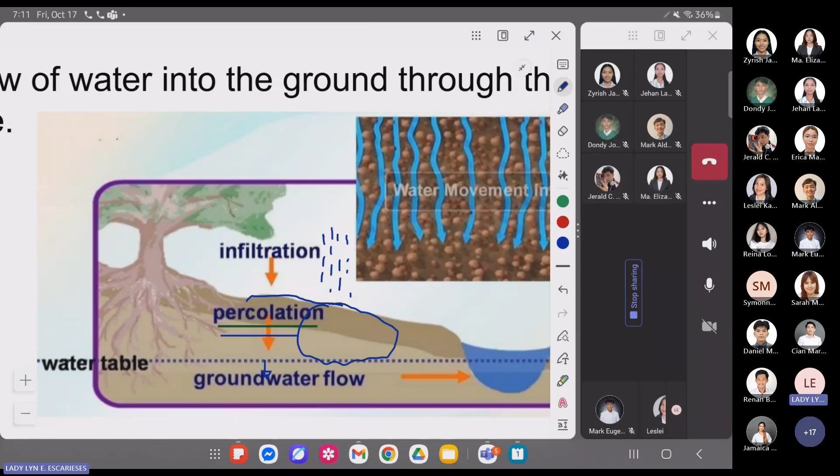So when we say infiltration, this is the flow of water into the ground through the earth's surface. When we say percolation, that is the flow going to the groundwater storage. So that is percolation.

So we calculate the infiltration rate and the cumulative infiltration. This is very important so we can know how much surface runoff there is in a watershed. The infiltration rate is the rate at which water enters the soil at the surface, while the cumulative infiltration is the accumulated depth of water.

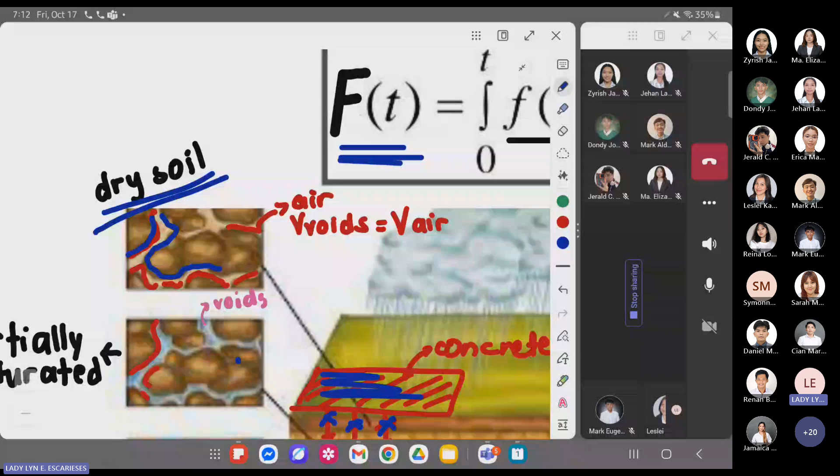As you can see in this figure, when soil is dry, the area of the void is equivalent to the volume of air. Or the volume of the voids is equivalent to the volume of the air, as shown in our figure. When it is partially saturated, some of the voids have water. Whereas when fully saturated, the volume of the void is equivalent to the volume of water.

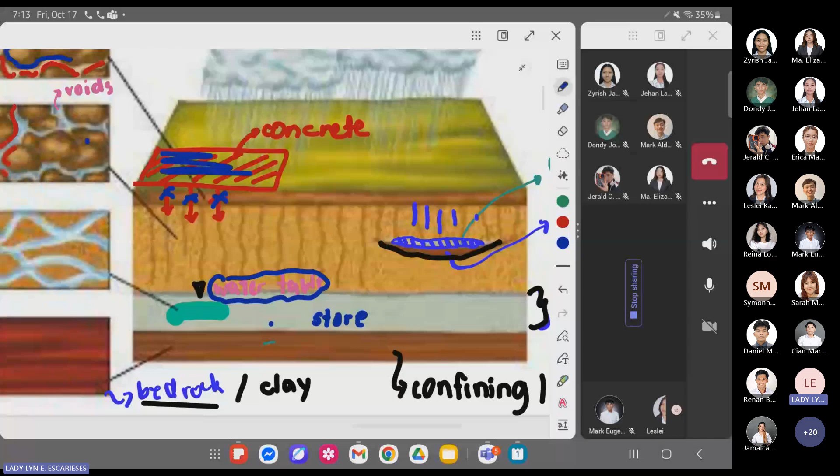But as you can see, this is higher than the water table. The water table we assume is constant, so that is the base flow. While at the aquiclude or aquitard, it's only a perched flow - meaning water only accumulates there when it rains heavily, or when water infiltrates at the location of the aquiclude and aquitard. Did you understand this?

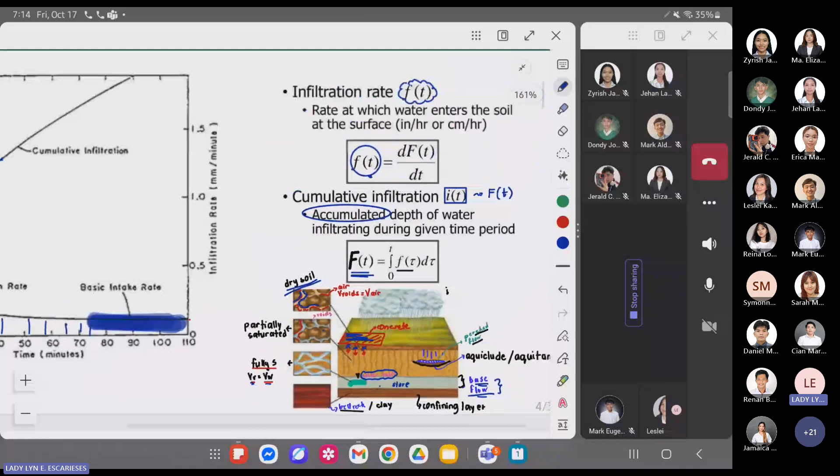Clear naman po. As you can see in our graph, the infiltration rate is inversely proportional to time. So as time goes on, the infiltration rate value decreases, because the soil is becoming fully saturated. When the soil is fully saturated, there's no more water that can infiltrate. Understood? So there's no more downward flow.

Okay, infiltration is downward flow. When fully saturated, the tendency of water is to flow laterally, though it still depends on gravity. And the cumulative infiltration, since it is the sum or accumulated depth of water, therefore increases as time increases. Is this clear?

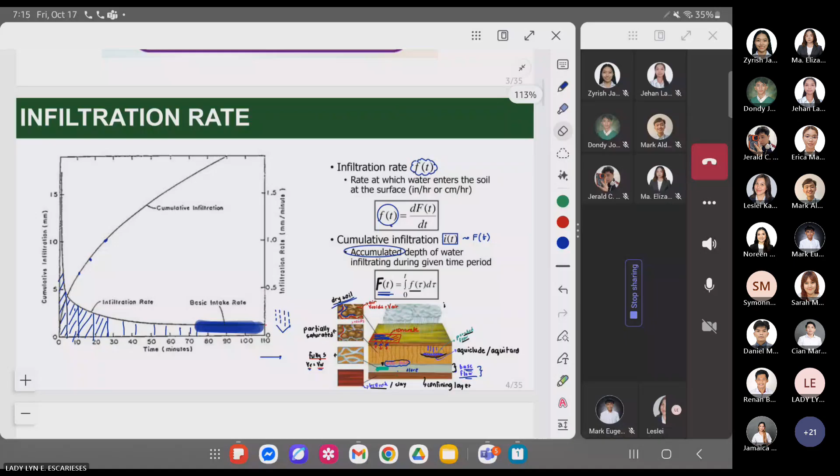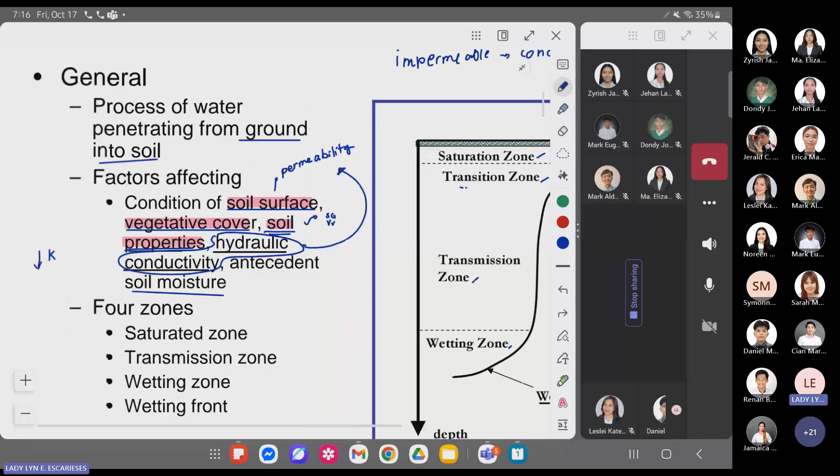So this is another visual representation of infiltration. As you can see, we have here the moisture content, which is theta, and this is what we call the wetting front. This wetting front is also a parameter we use to compute infiltration. There are 4 zones in the subsurface: the saturated zone, transition zone, transmission zone, and then the wetting zone and the wetting front.

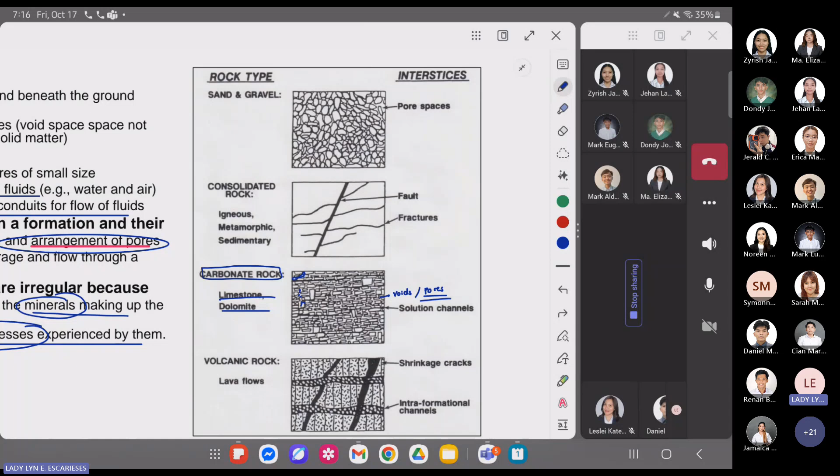As you can see, different types of rocks and soil have different voids or pores. These pore spaces or voids are where water can be stored or can flow. So this is the distribution of the subsurface water.

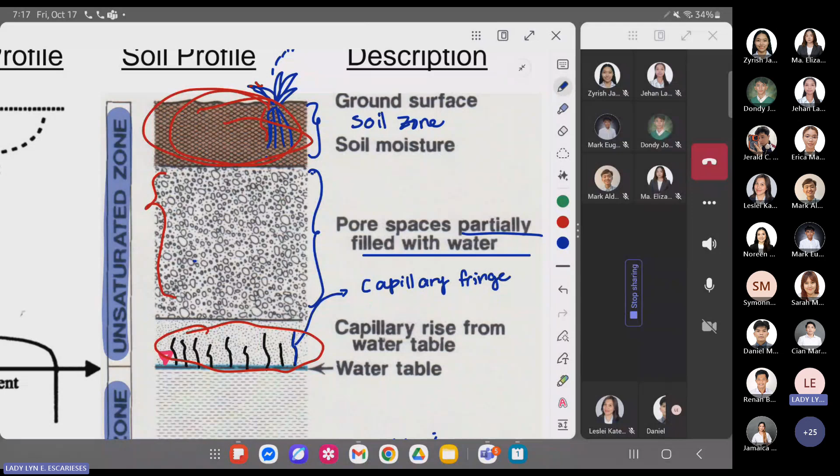The capillary fringe happens because of surface tension. So that happens because of surface tension, the water rises against gravity in its flow. So here, the soil is saturated, causing the capillary rise from the water table.

And then in this part, which is partially saturated - this is what we call the soil zone, also called the root zone. So when you proceed, when you take water resources as a specialization, these different parts are very important for irrigation engineering because the root zone is something we need to know.

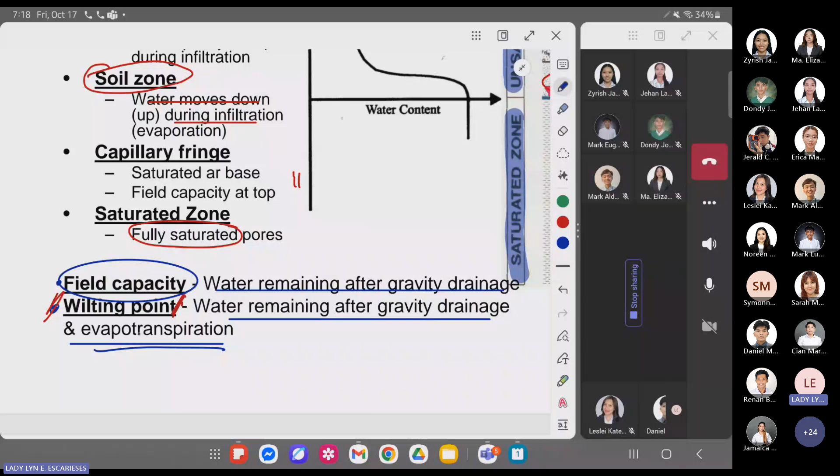This is the field capacity - the water remaining after gravity drainage. This is an important factor, same with the wilting point. We use the wilting point, along with field capacity, as parameters to determine the available water for different types of plants. The wilting point is the water remaining after gravity drainage and evapotranspiration. Okay po?

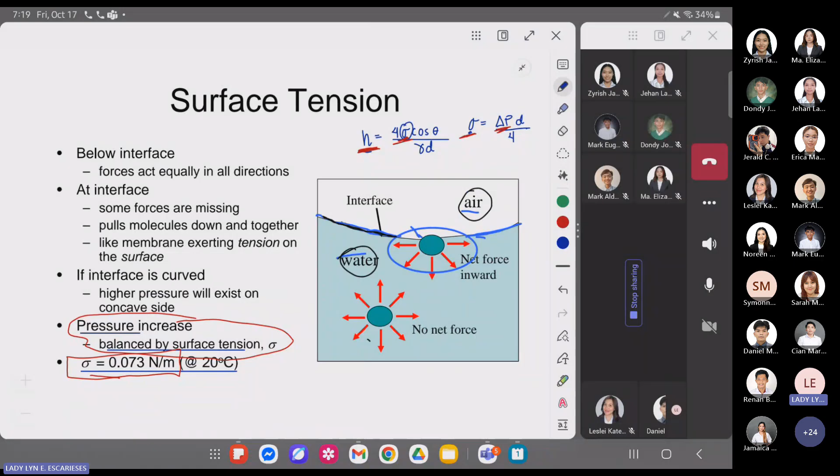So, as I mentioned, the capillary fringe happens because of surface tension. In general, in fluid mechanics, if you recall, the capillary rise is equivalent to 4 sigma cosine theta over gamma d. And the surface tension is equivalent to the change in pressure times the diameter over 4. So that diameter is the diameter of the pores or the spaces.

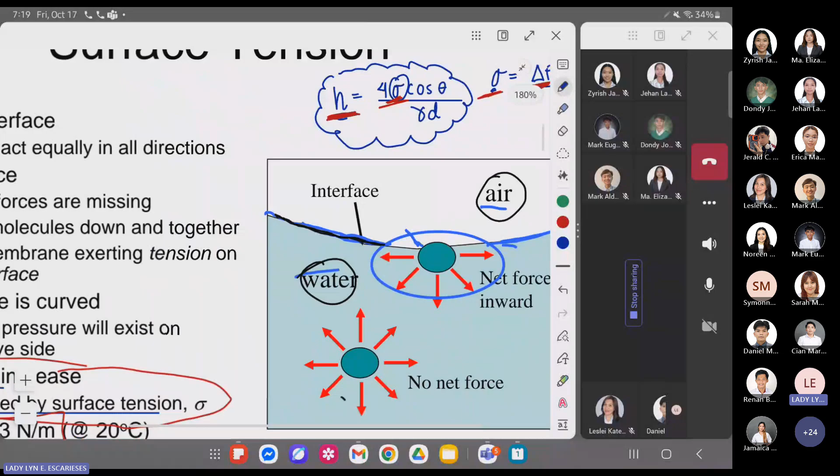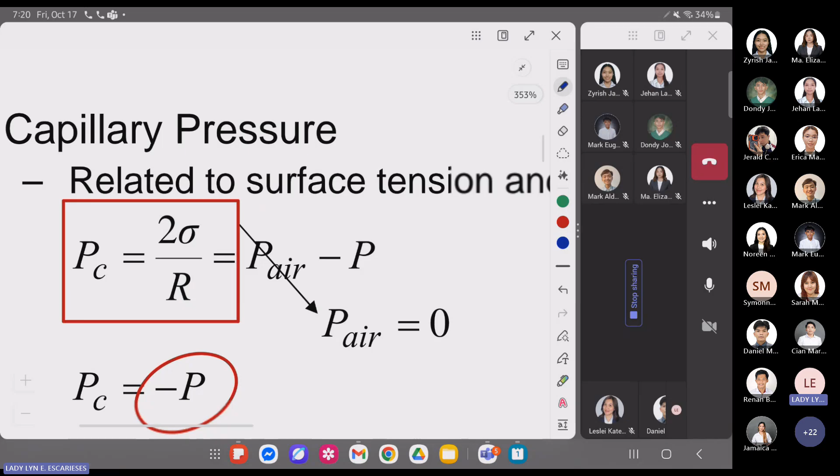So this is the capillary pressure. This is also the change in pressure times D over 4, since we know that R is equivalent to D over 2. So this came from the same relationship, this surface tension. Is it clear? Is it understandable? Since R is equivalent to D over 2.

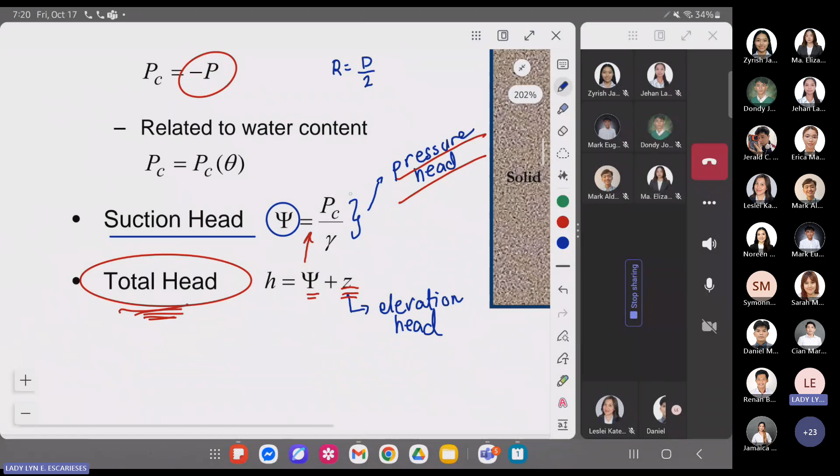Okay, so we have what we call the suction head or the pressure head. The pressure head is equivalent to the pressure over the unit weight, so this is the suction head. And the total head is equivalent to the pressure head plus the elevation head. You should recall this from hydraulics, right?

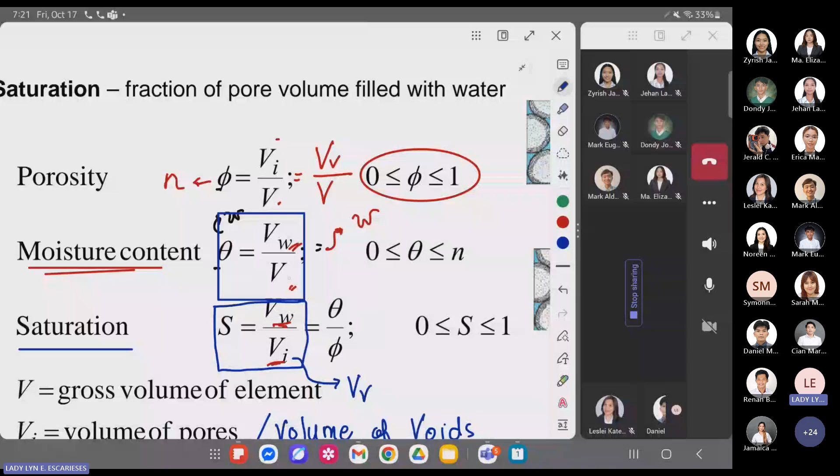The moisture content is equivalent to the volume of water over the total volume. Sometimes you'll see in books that this is the symbol for moisture content.

For the saturation, that is equivalent to the volume of water over the volume of the voids. So Vv is the volume of pores or volume of the voids. Do you remember this from geotechnical engineering? Do you still remember?

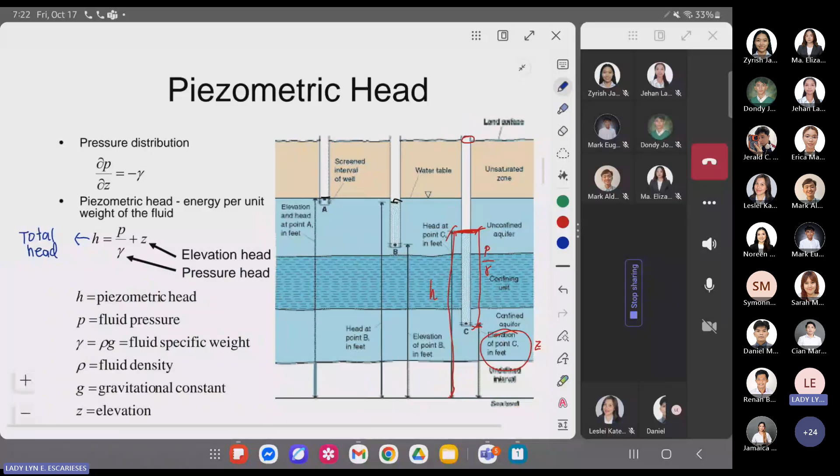Then we have the piezometric head, which is also the pressure head plus the elevation head, or what we also call the total head. So we're familiar with that already.

This part has more application in groundwater flow, this piezometric head. If you recall from geotechnical engineering, we have what we call the confined aquifer and the unconfined aquifer. So we're identifying now the flow in the confined and unconfined aquifer. We'll discuss this again in the last module, which is for groundwater. So this is the pressure distribution in the subsurface.

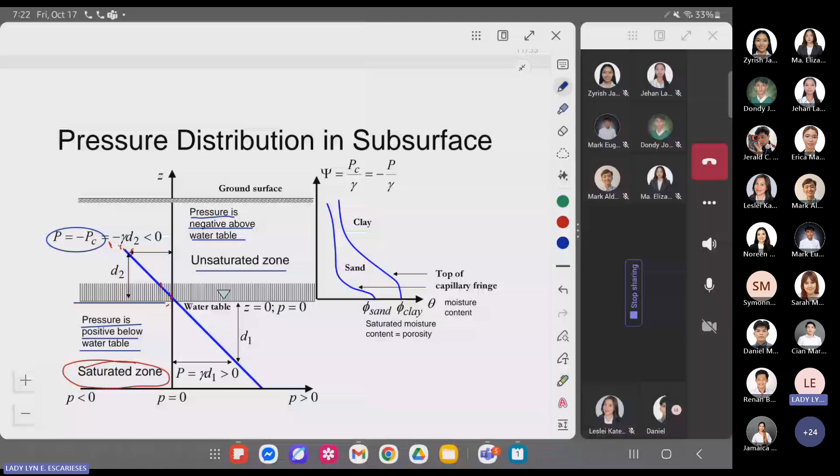As you can see, this part here is the unsaturated layer. This is what we call that layer. And this is the saturated zone. Oh, it's already labeled. Unsaturated and the saturated zone.

So in the saturated zone, as you can see, the pressure is positive, right? As the depth increases, the pressure increases, since it's already fully saturated. In the unsaturated zone, the pressure is negative, so it's inversely proportional, the relationship of the pressure.

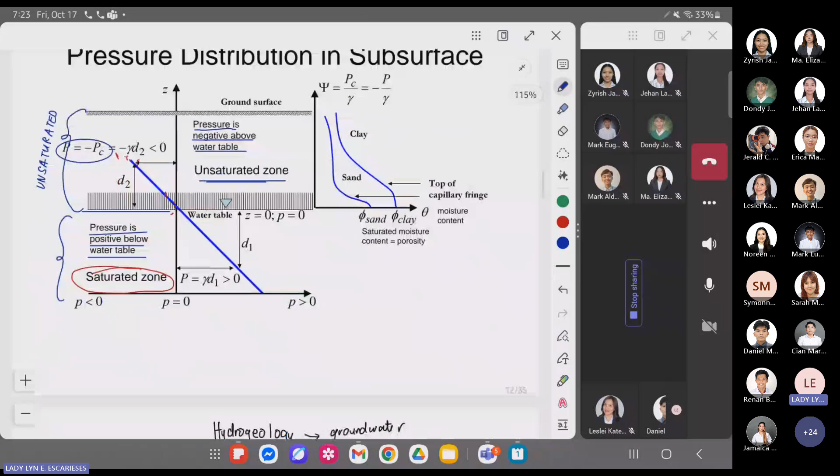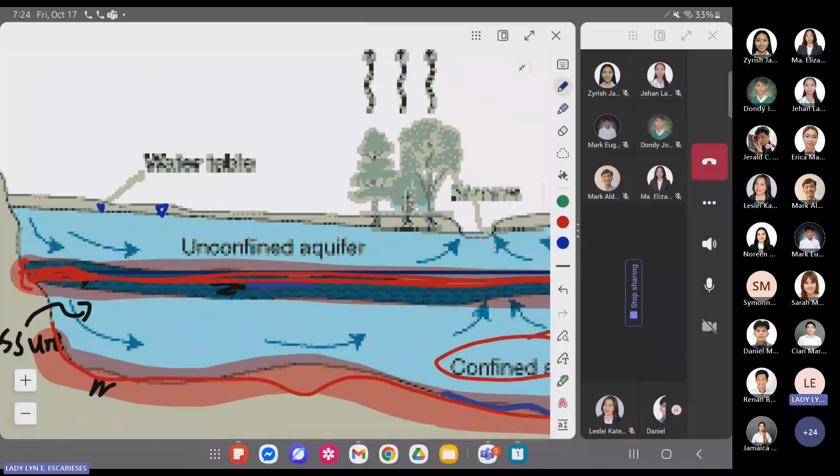Okay, so we have two types of aquifer: the confined aquifer and the unconfined aquifer. When we say confined aquifer, it is bounded by an impervious layer, while the unconfined one is not bounded. This is what we call the phreatic aquifer or the water table aquifer. As you can see here, the one on top is the unconfined aquifer, then this is the water table.

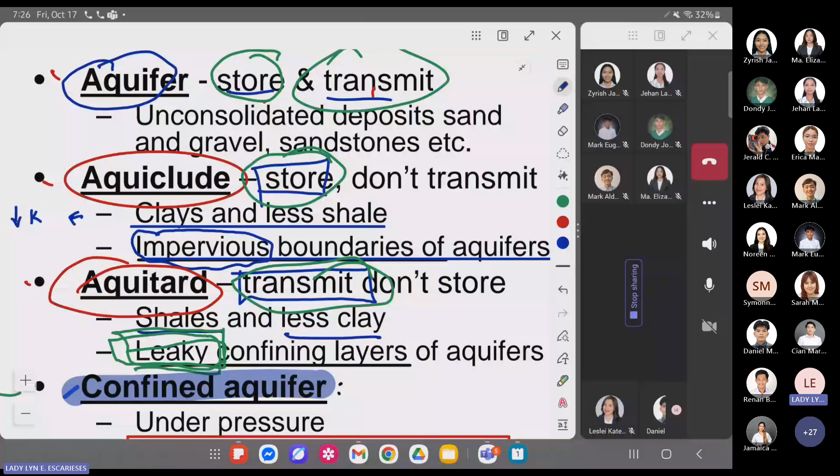Naintindihan naman po ba yon? Maliwanag naman po ba ang difference ng mga aquifer, aquiclude at aquitard, as well as the two types of aquifer?

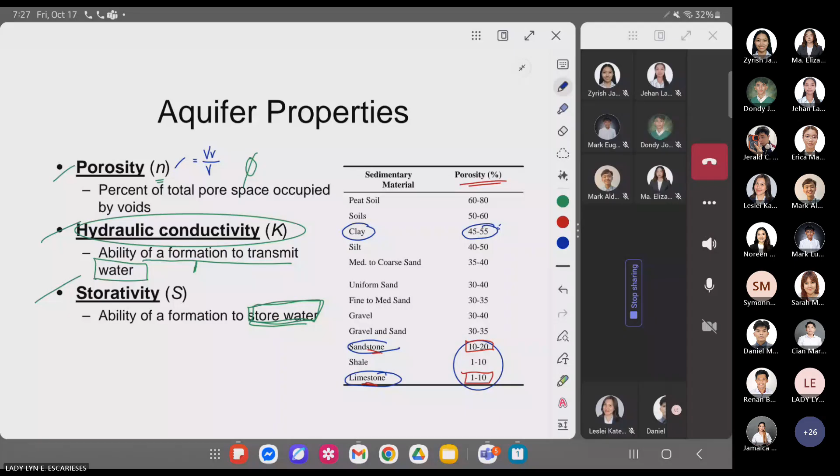Punta naman tayo sa Darcy's Law. Familiar kayo dito sa geotech na pinag-aralan na rin ito, yung flow. Q is equivalent to KIA. K is the hydraulic conductivity, and I is the hydraulic gradient, which is equivalent to delta H over delta L, or the length, multiplied by the area.

Using the continuity equation and the Richards equation, makukuha natin yung relationship ng porosity, yung flow ng soil o ng water doon sa soil, dependent on the porosity and the moisture content.

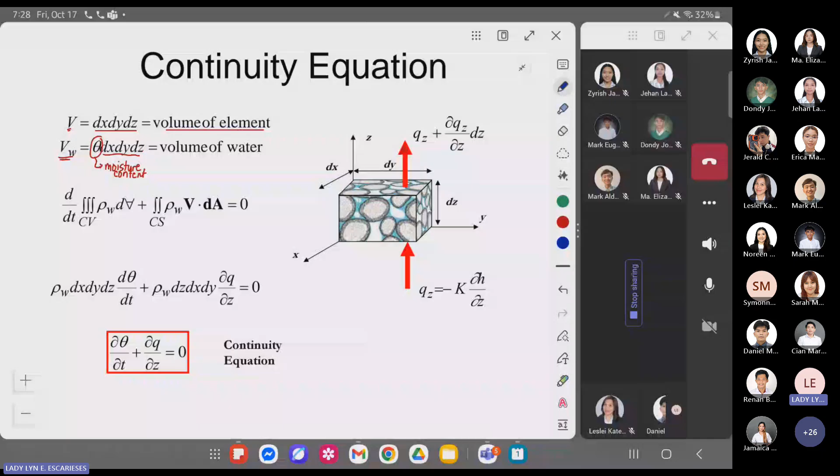Okay, so for this particular module, ang focus lang natin ay infiltration. Hindi pa tayo magdi-discuss dito ng in-depth na aquifer, o yung confined aquifer and unconfined aquifer. Dito pa lang tayo sa infiltration.

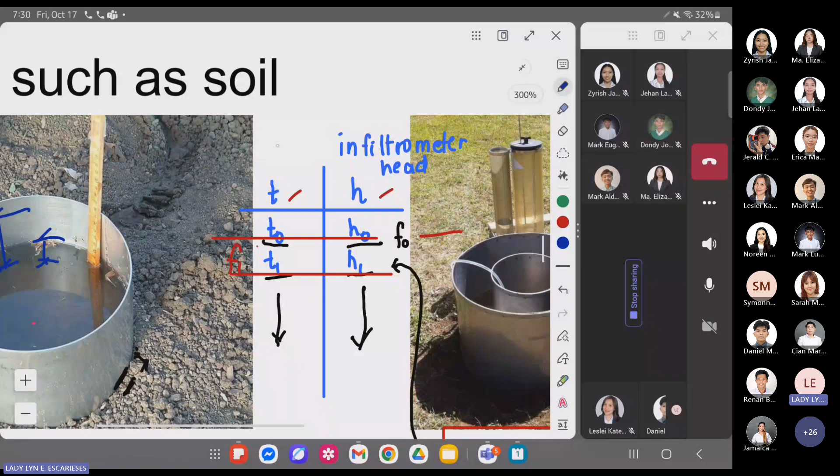For the infiltration, using the infiltrometer, meron tayong ring. Itong ring na ito, nilalagyan ng water at a certain depth. Let's say ito yung initial depth of water. Every time, pwedeng time interval ay 30 minutes or 1 hour, mini-measure ulit yung height. Ang data, time, and yung infiltrometer head, yan yung data na nakukuha.

Para ma-identify natin yung infiltration at time 1, at T sub 1, that is equivalent to H sub 1 minus H sub 0 over T sub 1 minus T sub 0. Ginagamit natin yung preceding na data, preceding time, for that infiltrometer head.

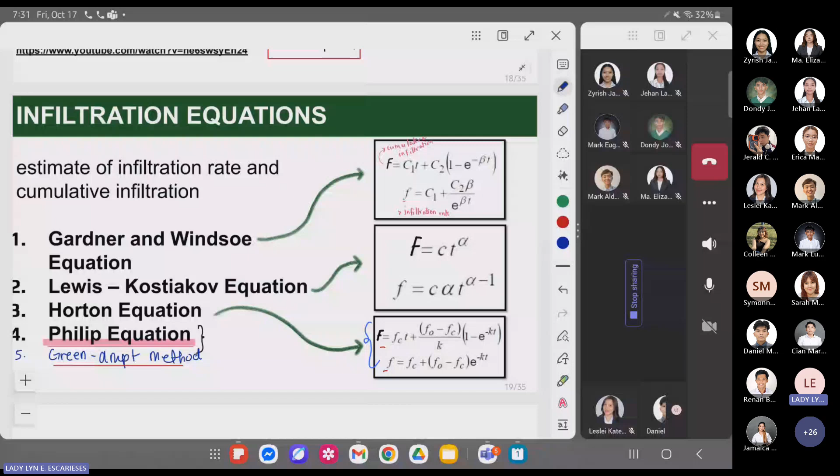So we have different infiltration equations: the Gardner and Windsoe equation, Lewis-Kostiakov equation, Horton, Philip, and the Green-Ampt equation or Green-Ampt method. Ang focus natin dito would be the Philip equation. Yan yung focus ng discussion natin ngayon. Ito yung mga infiltration method na pwedeng gamitin natin.

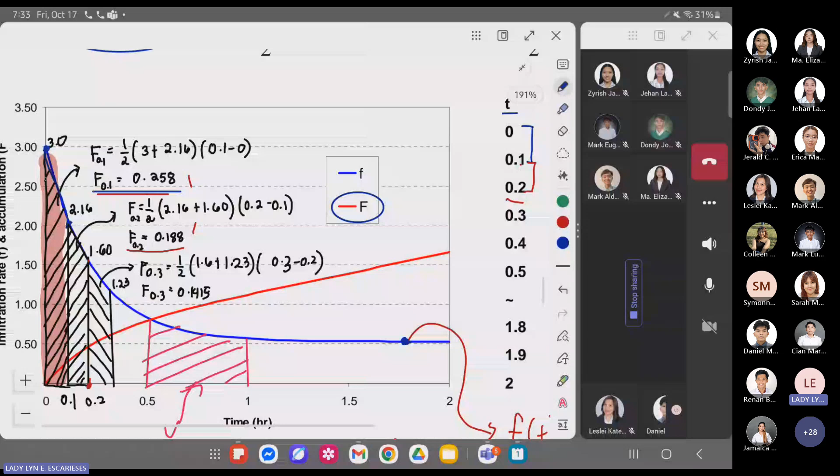Naintindihan po ba yon? Sa kasong ito, pwede tayong gumamit ng trapezoidal rule. This is the equation para sa trapezoidal rule: equivalent to change in time over 2, multiplied by f sub 0 plus 2 times the summation of the intermediate values of infiltration plus the last infiltration. Ito ay na-analyze based on assuming na itong area na ito ay trapezoid, kaya nga siya tinawag na trapezoidal rule.

Rule kasi, ina-assume natin na yung area under a certain time interval is equivalent to trapezoid. So as you can see, using the trapezoid area, that is equivalent to 1/2 times 3 plus 2.16 multiplied by 0.1 minus 0. Diyan, galing dito, pag pinag-add-add natin yung mga area na yan, madederive itong equation na ito. Naintindihan po ba? Kung naalala niyo sa surveying, may trapezoidal rule.

Kung na-discuss sa inyo, yung trapezoidal rule, Simpson's 1/3 rule. Ganun lang din yun dito. Pwedeng i-apply natin. Naintindihan po ba yun?

So, the cumulative infiltration at 0.1 hr is equivalent to 1/2 times 3 plus 2.16 multiplied by 0.1 minus 0. So this is equivalent to,

ito yung base 1 plus base 2 multiply by height. Formula lang yan ng trapezoid. Nagigets po ba yun? Maliwanag naman. So that is equivalent to 0.258.

So para dito sa pangalawang area, that is equivalent to 1/2 times 2.16 plus 1.6 times 0.2 minus 0.1. So that is 0.188. Itong 0.1 minus 0.0, itong 0.2 minus 0.1, ayan yung time interval. Kaya may nakalagay dito na delta t.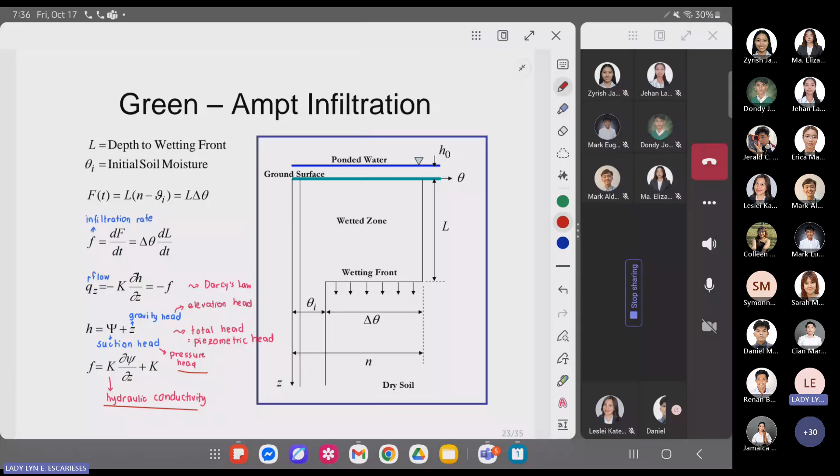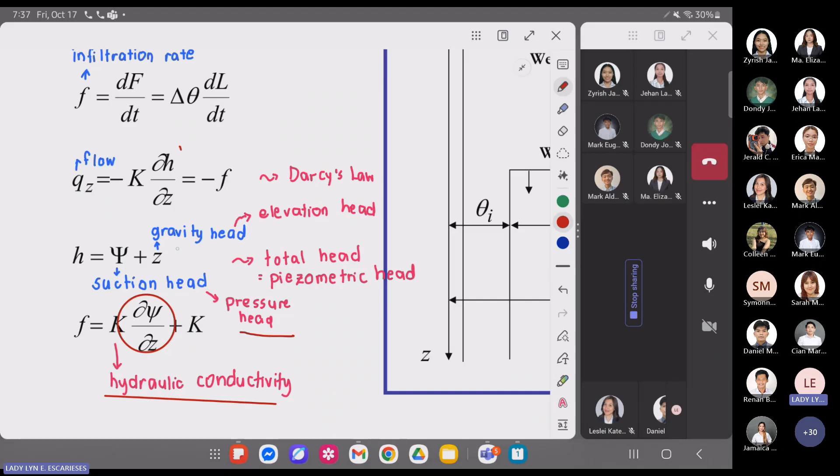Okay, sige. So ito naman ang mga equation para sa Green-Ampt infiltration. So for the Green-Ampt infiltration, psi is the suction head and Z is the gravity head or the elevation head. So the infiltration is equivalent to the hydraulic conductivity multiplied by the partial derivative of the suction head with respect to the gravity head plus K.

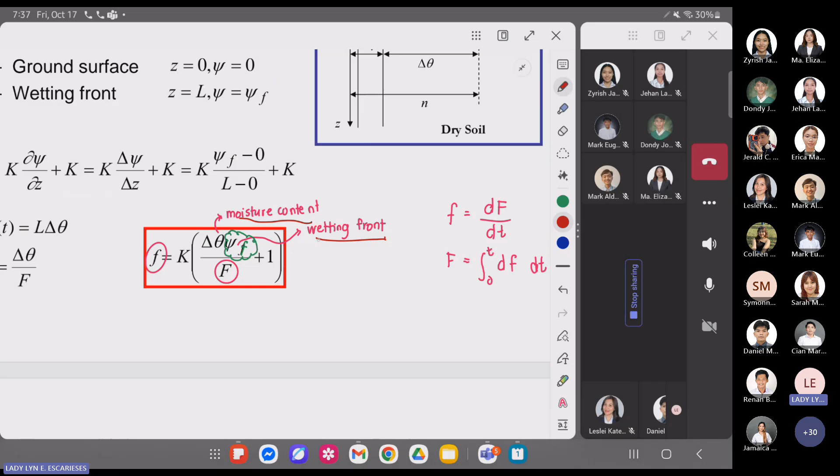Okay, K is the hydraulic conductivity. So to simplify, F is equivalent to K multiplied by the change in moisture content multiplied by the wetting front over F. F is the cumulative infiltration plus 1. So kung mapapansin natin, yung infiltration rate ay in terms of cumulative infiltration.

So meaning, itong equation na ito ay pwede lang nating ma-solve using trial and error. Kasi alam natin na itong F, itong cumulative infiltration ay dependent doon sa infiltration rate. So kung nandito siya both sa equation, kailangan nating mag-trial and error. Okay po, naintindihan naman 'yon.

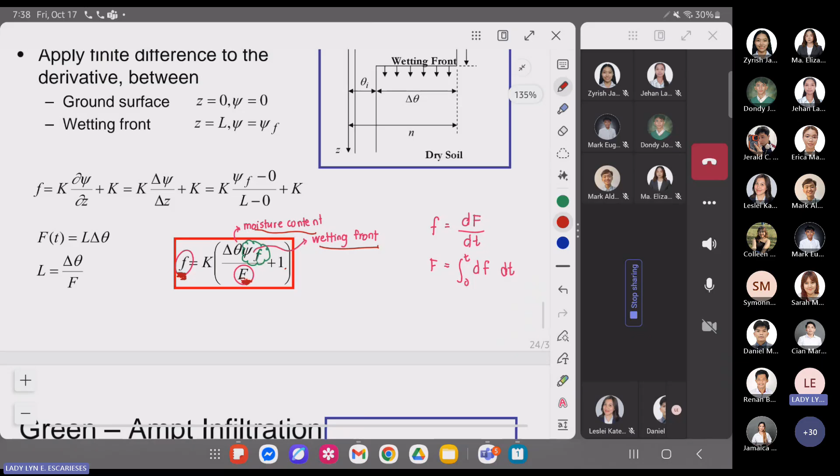Ayan, so this is, ayan yung sinasabi natin na non-linear yung kanyang equation. So therefore, it requires iterative solution. Or mag-iterate tayo, or yung numerical solution.

Naalala nyo pa ba, may NAMSOL na ba kayo? May NAMSOL na kayo? Na-take na po, ma'am. Ayan, so Newton-Raphson method, naalala nyo pa yon na na-discuss naman. So, nasa-solve siya using that. Okay? Clear po?

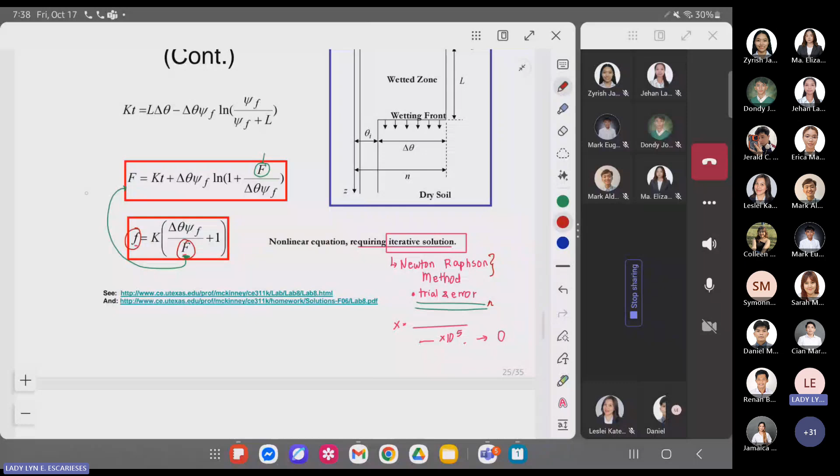I-ano kaya natin to, no? Charot lang, hindi na. Hindi na tayo dito magnanamsol, para baka umiyak na tayo dyan. Baka umiyak na yung mga bata dyan. Okay.

So, ito yung mga soil parameters. Take note na lang tong mga soil parameters. The effective porosity is equivalent to porosity minus the residual moisture content. And then the change in moisture content is equivalent to 1 minus the effective saturation. So S sub E is the effective saturation multiplied by the effective porosity. While the effective saturation is equivalent to the available moisture content minus the residual moisture content over the effective porosity. Okay, ayan yung mga parameter na ginagamit for Green-Ampt.

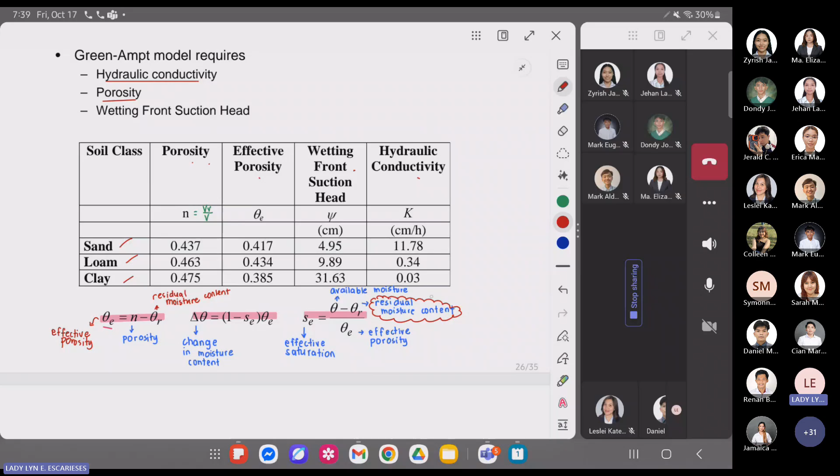Kaya nga medyo komplikado, kapag ito yung ginamit mong data or method sa pag-compute ng infiltration kasi maraming data na kailangan.

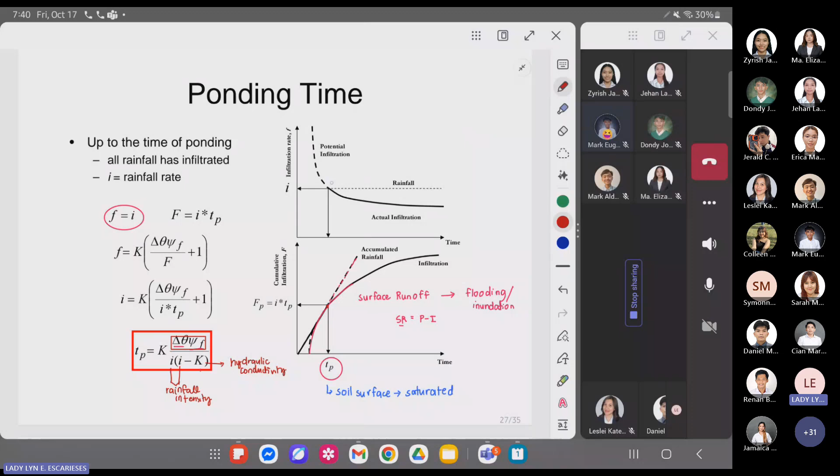So, using Green-Ampt method, we could also compute for the ponding time. So, ponding time is the time of ponding. Yung time na parang yung water, bago siya fully saturated. Ano po, yun yung time of ponding. Okay, ito yung T sub P. Bago siya fully saturated.

So that ponding time is equivalent to K. K is the hydraulic conductivity multiplied by the change in moisture content, multiply by the wetting front over I. I is the rainfall intensity minus the hydraulic conductivity.

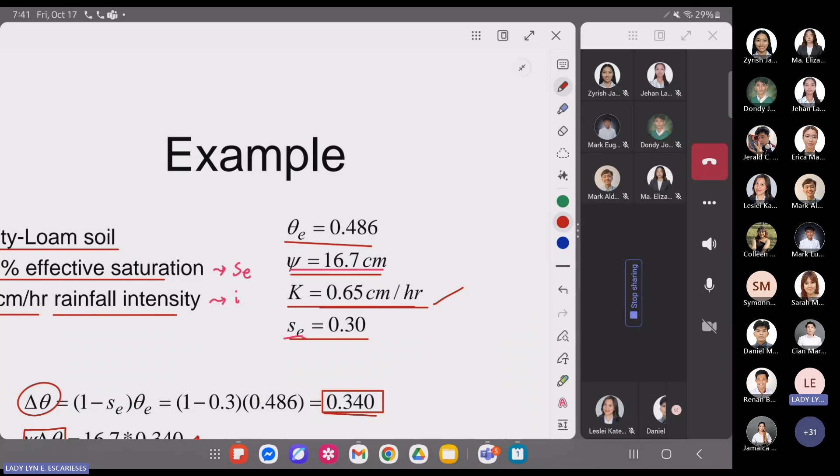Okay, so using this example, if in a certain area, silty loam yung soil, the effective saturation is 30% and the rainfall is 5 centimeter per hour, use the effective porosity to be equivalent to 0.486. The wetting front is 16.7 centimeters. The hydraulic conductivity is 0.65 centimeter per hour. And the effective saturation is 0.3.

So, pinapasolve sa atin dito ngayon is the ponding time. So, to solve for the ponding time, we need to solve first itong change in the moisture content.

So, the change in moisture content is equivalent to 1 minus the effective saturation times the effective porosity. So that is 1 minus 0.3 times 0.486, which is equivalent to 0.340.

Let's substitute this right away. So, the ponding time is equivalent to the hydraulic conductivity multiplied by the change in moisture content, which is equivalent to 0.340, multiplied by the wetting front over the rainfall intensity times the rainfall intensity minus K.

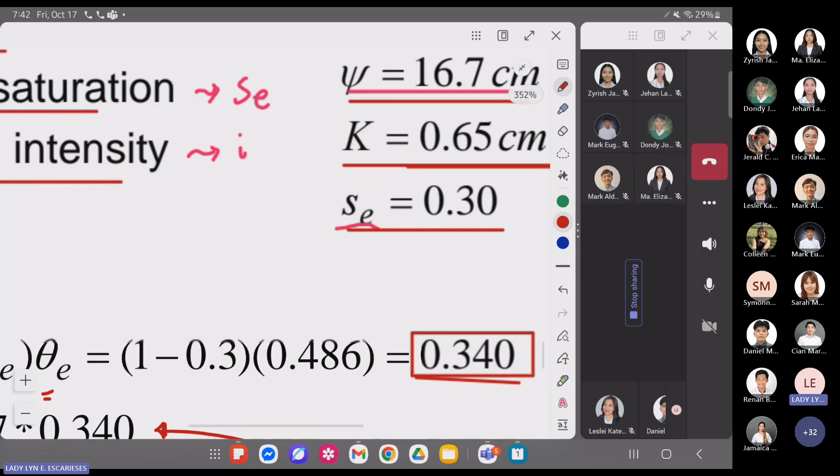So let's substitute. So 0.65 multiply by 16.7 times 0.34. 16.7 is the wetting front, 16.7 centimeters. Okay?

All over the rainfall intensity. So 5 times 5 minus 0.65. So is it correct that this is 0.17 hours? That is the ponding time.

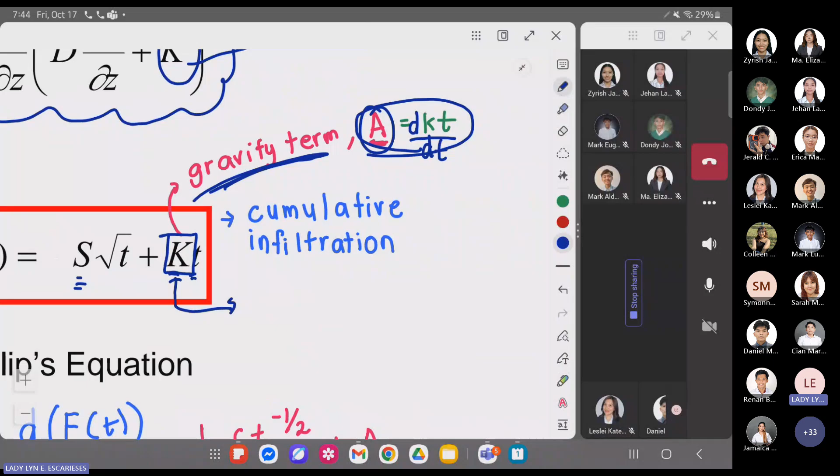Which is the derivative of K sub t over d sub t. So to simplify, the infiltration rate, when we take the derivative of the cumulative infiltration, is equivalent to the infiltration rate. So that is equivalent to 1/2 times S times T raised to negative 1/2, plus A.

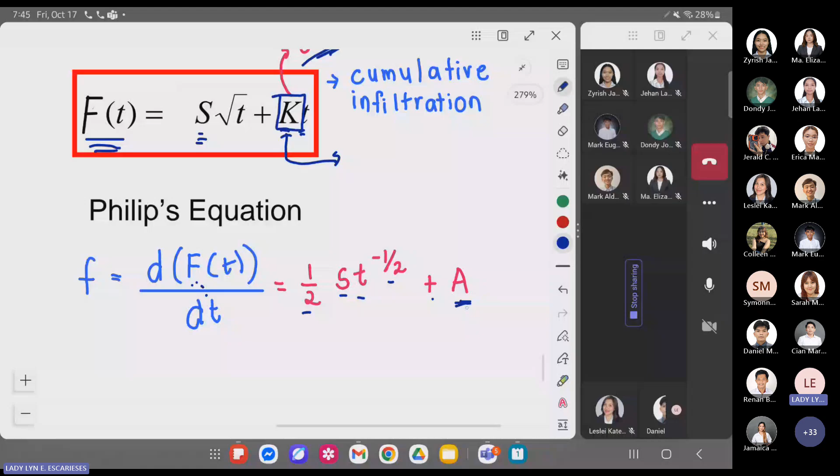A is the gravity term. Okay? Is this understood? So this is what will become our equation for the infiltration rate using the Philip's equation.

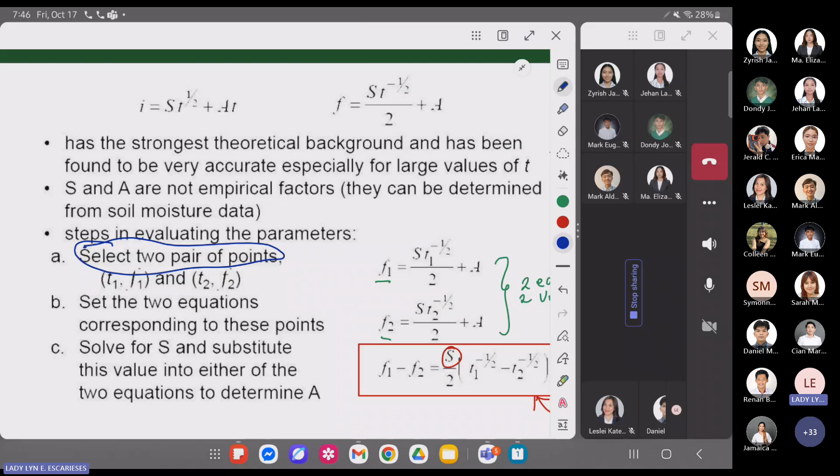So take note that for the Philip's equation, it has the strongest theoretical background, meaning it is said to be very accurate compared to other methods. Okay, so let's remember these two equations. These are the ones we'll use for the Philip's equation.

So to solve for the S and A parameters, and to use them to evaluate the infiltration rate at any given time, what we'll do is identify 2 points to consider for these 2 equations. Okay, so this equation here just came from the infiltration rate.

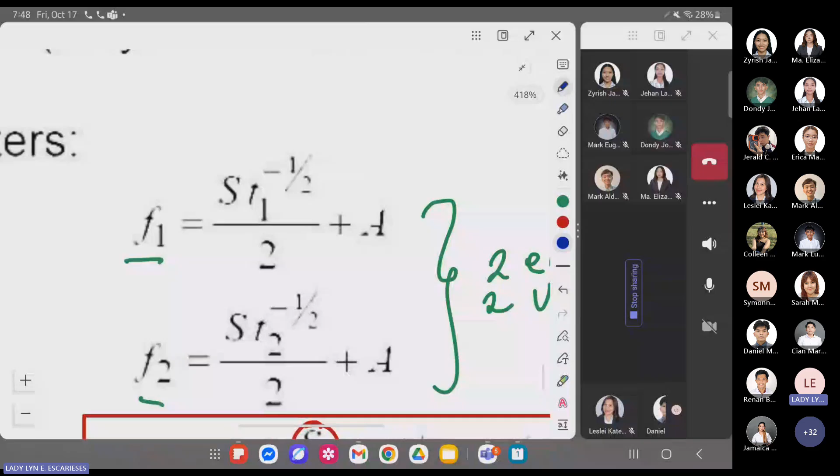So the gravity term A is equivalent to F1 minus S times T sub 1 raised to negative 1/2, over 2. And also, A is equivalent to F sub 2 minus S times T sub 2 raised to negative 1/2, over 2. That's just derived from these two equations. Understood? And the value of F1 and F2 come from our infiltrometer data.

So to solve for S, first we need to solve it, we equate the A's. So A is equal to A, therefore S is equivalent to 2 times delta F, or change in F, over T sub 1 raised to negative 1/2 minus T sub 2 raised to negative 1/2.

So we can derive that the value of S, or the sorptivity, is equivalent to 2 times F1 minus F2 over T sub 1... let's just do it this way, since it's negative 1/2 after all.

So, kailangan nasa numerator. So, ganito na lang natin: minus T sub 2 raised to negative 1 half. So, yan yung equation natin for S. Then, kapag na-solve nyo na yung value ng S, substitute lang dito sa equation 1 or sa equation 2 para ma-solve yung gravity term. And then, kapag na-solve nyo na yung S and A, pwede na natin yung substitute dito sa formula ng infiltration rate para ma-solve naman natin, let's say, unknown naman tong time o kaya unknown yung infiltration. Okay? Maliwanag po ba yung mga formula? Para makapag-example na tayo.

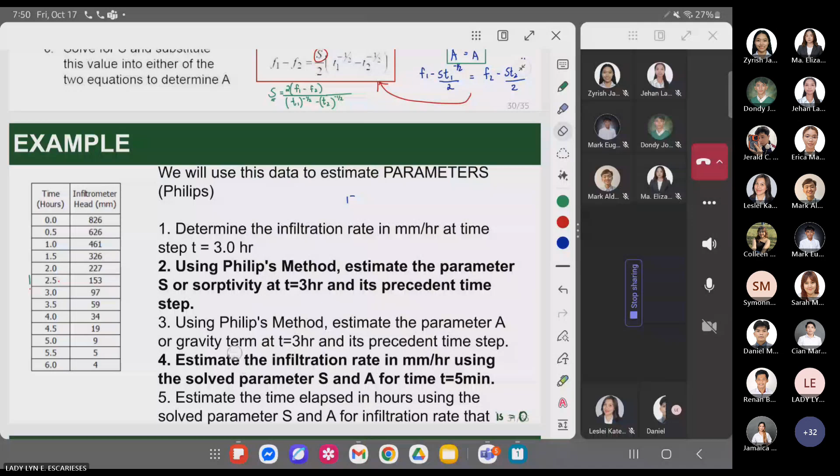Okay naman? Sige, example tayo. So in this example, we will use the data to estimate the parameters for Philips. So determine the infiltration rate in millimeter per hour at time step t is equal to 3 hours. Using Philip's method, estimate the parameter S at t is equal to 3 hours and its precedent time step, meaning yung nauna. And using Philip's method, pinapasolve din sa atin yung gravity term. And then estimate the infiltration rate in millimeter per hour using the solved parameter S and A for time t is equal to 5 minutes. So using the same value of S and A, estimate the time elapsed if the infiltration rate is 0.

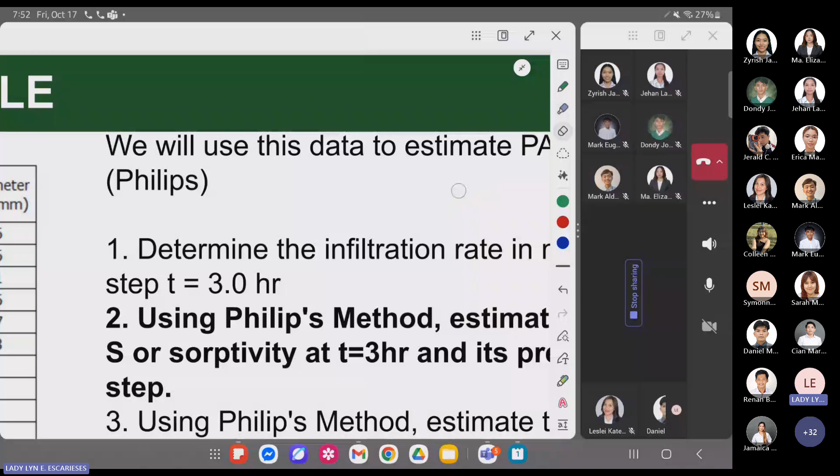Okay po. So, ang unahin natin ay, since pinapasolve sa atin, for number 1 is the infiltration rate in millimeter per hour at time step t is equal to 3 hours. So therefore, ang pinapasolve sa atin dyan ay yung t sub 3. Naintindihan po ba yon? T sub 3. So in this infiltrometer data, meron tayong ilang data ito? Ay, mali. Hindi na pala natin kailangan numberan kasi naka-ano pala ito, 0.5 hours. Ito na yon. So, at time t is equal to 3 hour, ito na yon. Okay po, naintindihan po ba? Ito yung time na kino-consider natin. Maliwanag.

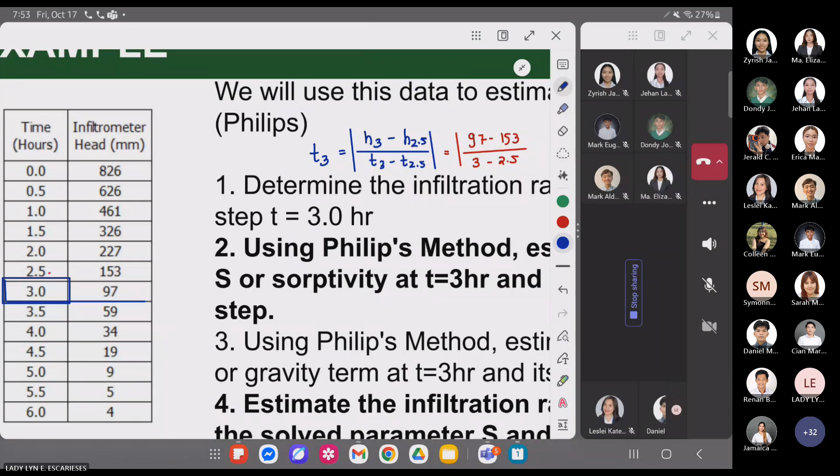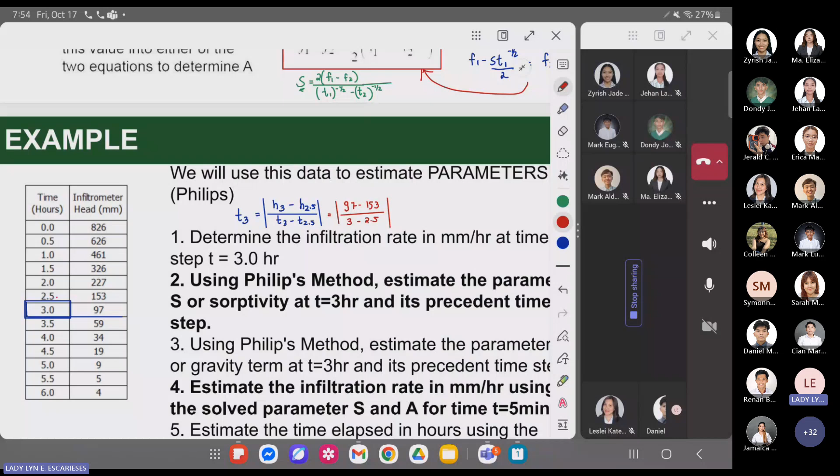Ma'am, excuse me lang po, naka-mute po kayo. Ay, ba't ako nakamute? Mula kailan? Mula kailan ako nakamute? Nung sinusulat niyo na po ma'am yung equation. Dito lang, dito? Yes po. Yes po, ma'am. Okay. Dito lang naman pala. Ayan. So, sige, napindot ko lang siguro.

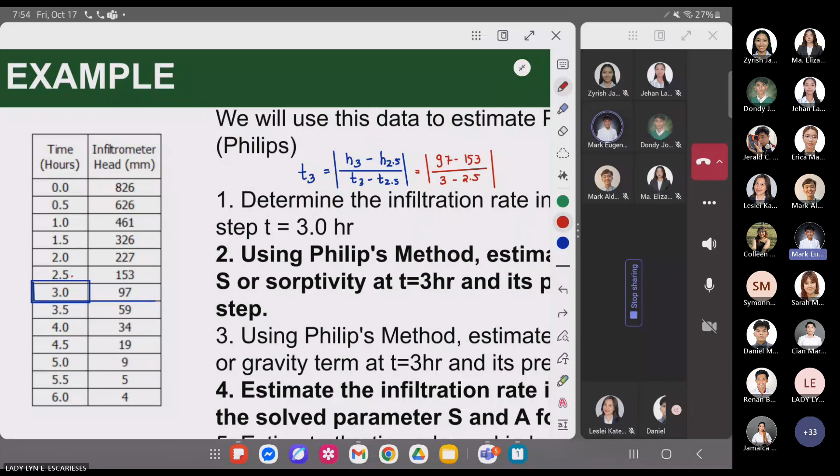Sige, solve natin. 97 minus 153 over 3 minus 2.5. So, ano ang value? 112 po. So, 112 millimeter per hour. So, ayan yung T sub 3. Okay?

Ma'am, naka-mute po ata ulit kayo. Sorry. Ba't ba namu-mute?

Okay, dito naman, sa pangalawa, using Philip's method, we are asked to estimate the parameter S at T is equal to 3 hours. Ipagsabay na natin tong 2 and 3, no? Kasi sabi, at precedent time step. Okay? So, dito naman, ano ba ito? Anong time step ito? Anong time step yung kailangan nating gamitin?

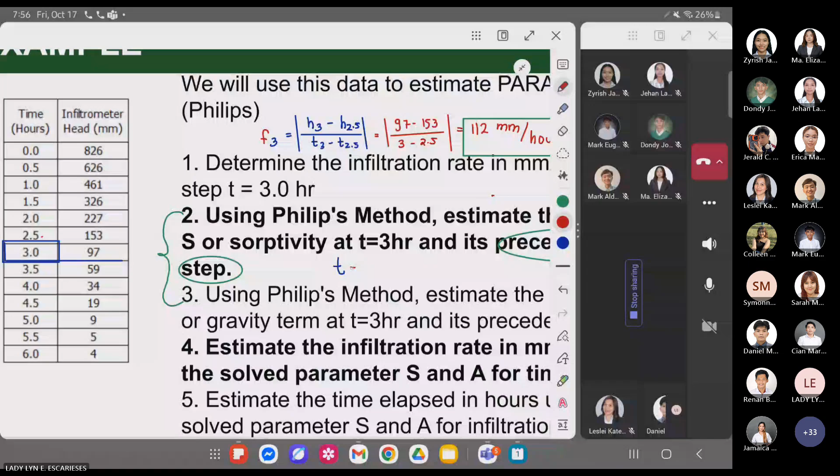Sorry, ito dapat ay F ha. F yan, F sub 3. So, at time, ano po? Equal to? So, gagamitin natin yung F sub 3 dito, no? At T is equal to 3 hours and T is equal to, ano? Ano ba yung nauna sa 3 hours? 2.5 po. Okay, so yung 2.5 hours. So, yan yung gagamitin natin, dalawang time step.

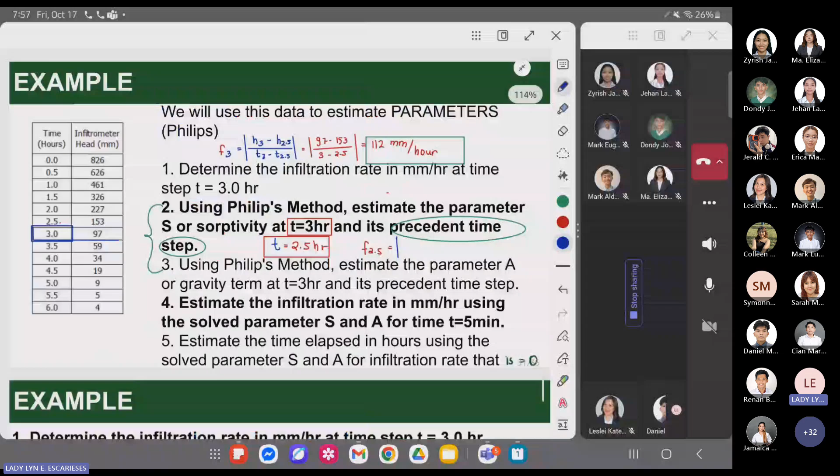So, ibig sabihin, kailangan mong isolve yung infiltration rate at 2.5. Okay? So, para ma-solve natin yung infiltration rate at 2.5, ito naman yung gagamitin or isa-solve natin. Yan. So, that is equivalent to 153 minus 227 over 2.5 minus 2. Ano pong sagot? Ilan po? 148 po. 148? Tama po ba? Yes po, ma'am.

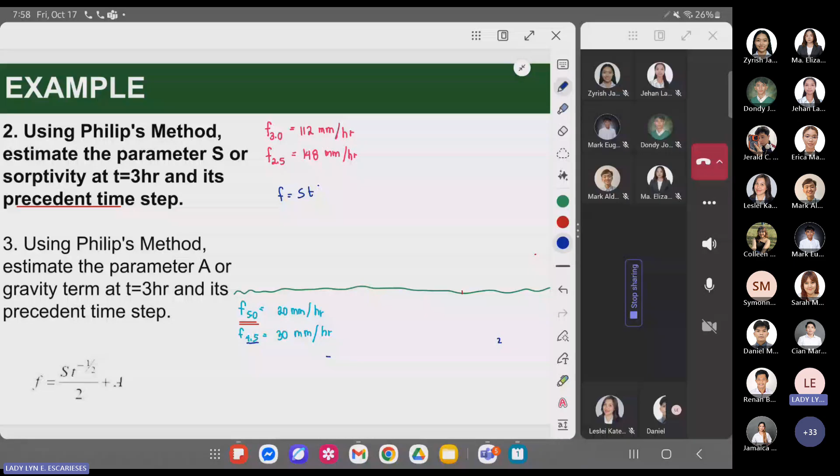Okay. So, alam natin ngayon that, ito no? F sub 3 is 112 millimeter per hour and F sub 2.5 is 148 millimeter per hour. So, using the equation of Philip's equation, F is equivalent to S times T raised to negative 1/2 over 2 plus A. So, using that, pag sinubstitute natin yung for T is equal to 3 hours, F is equivalent to 112. T is equivalent to 3 hours. So, ito ay naka 3 hours. And plus A, no? So, yan na yung equation.

So, at T is equal to 2.5 hours, this is equivalent to 148 equals S times 2.5 raised to negative 1/2 over 2 plus A. Okay, so yan yung dalawang equation na gagamitin natin. Okay po, pwede kayong mag-mode equation two unknowns. Two equation, two unknowns. Marunong kayo nun sa calcu, di ba? Marunong naman. Sa calcu. So, two unknowns yung piliin. Okay? So, in this case, kapag yun yung pinili natin, ito ngayon yung magiging coefficient for S. Tapos yung coefficient for A ay 1. Tama?

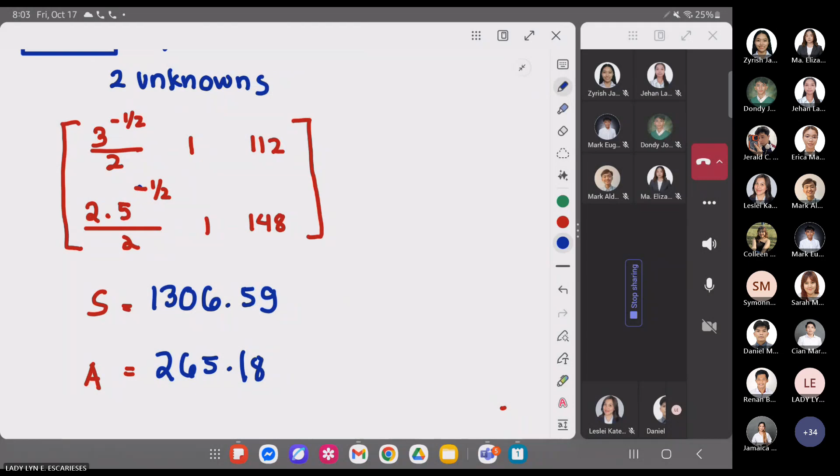So, ang unit nito ay millimeter. Dahil hours yung ginamit natin, ano, hours, raised to negative 1/2, okay? Or millimeter per hour, per square root of hour. Okay? Gets naman.

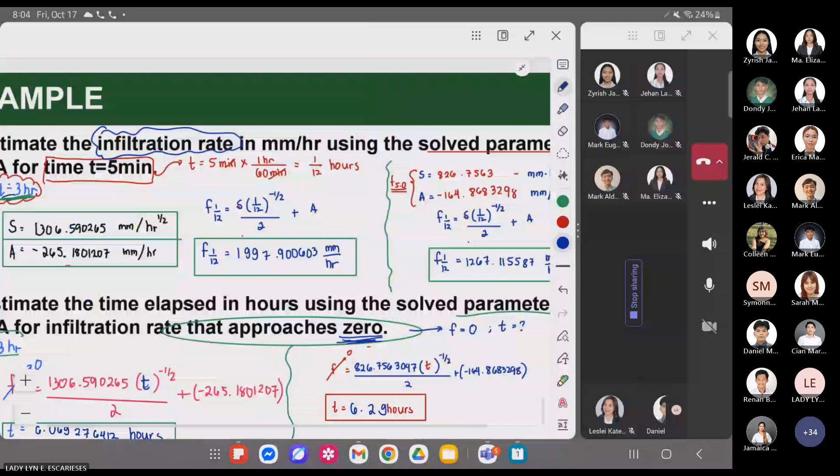And then, ano ang unit ng gravity term? Ayan. Millimeter per hour. Millimeter per hour. Ayan. Okay? So, nasolve na natin yung S and A.

Marunong ba lahat gumamit ng calcu? So, pwede rin naman nating gamitin yung ating derived equation. So, this is the derived equation. So, try natin gamitin ito kung same lang ba yung magiging sagot.

So, using the derived equation, S is equivalent to 2 times F1 minus F2 that is yung 148, minus 112, all over 2.5 raised to negative 1/2 minus 3 raised to negative 1/2.

Same lang ba yung magiging sagot? Same lang po ba? Same lang po, ma'am. Yes.

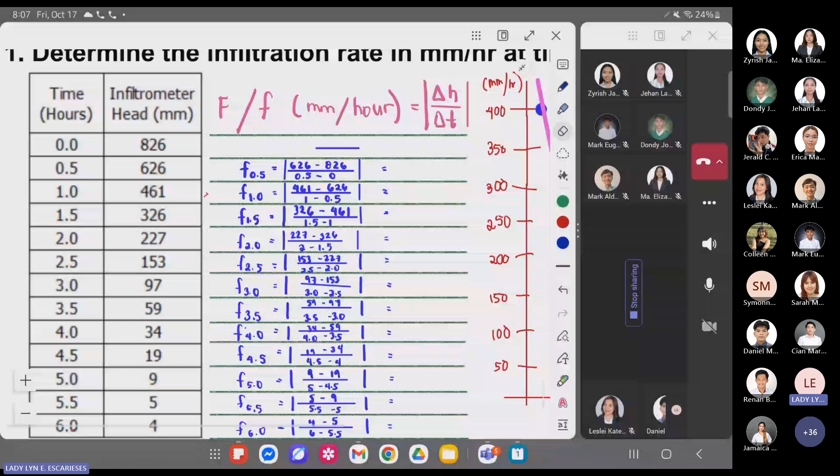Okay. So try nating, bago tayo mag-proceed dun sa second question, try nating isolve yung other points, no? Or yung mga other infiltration rate, no? With respect to different time. Solve natin. Anong infiltration rate at 0.5 hour?

So that is 626 minus 826 over 0.5. Ano pong value? 400. 400 po. 400.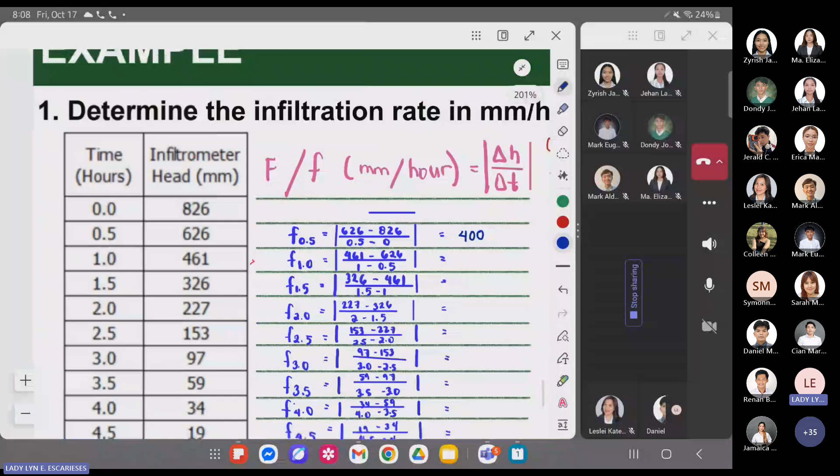So, ito 148, ano? 98 yung po ba? For 2 hours. Opo. Anong sagot? 98 po. 98? Bakit mababa? 227 minus 326, divided by 198 po. 198. Kala ko 98 lang, sorry. 98 lang naririnig ko.

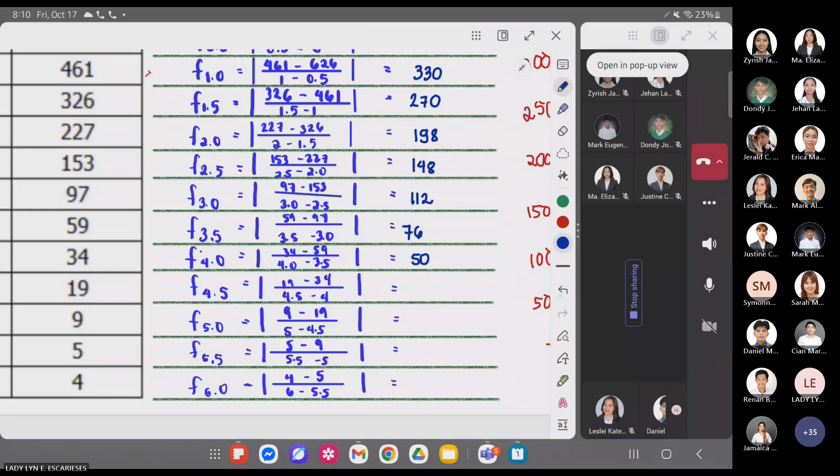3.5. 76 po. Ilan? 76 po. 76. Next. For 4 hours, 50 po. 50. 50? 60. 50? Yes po, ma'am. Okay.

For 4.5 hours, 30 po, ma'am. 30. For 5 hours, 20 po. 20. 5.5, 8 po ba? Okay. For 6 hours, 2 po.

So as you can see, no, nagdi-decrease yung infiltration rate habang tumatagal, no? So ito yung graph niya, no? Partially yan yung graph. Naintindihan naman po ito. Clear naman yan, ano? Try nating isolve yung S and A.

So, tandaan nyo, yung S and A, nagbabago yan dependent on the property of soil. Eh, di ba, kung nagbabago yung saturation, nag-iiba yung moisture content. O di nagbabago din yung property ng soil. Ano po? Nagbabago din yung pressure head, and then yung pressure head, so, yung suction head na tinatawag. Okay? So, try nating isolve kapag ito yung ating value.

If ang gagamitin natin ay 5 hours and 4.5 hours. So, 5 hours is 20 and 4.5 hours is 30. So, what would be the value of S and A? Okay? So, try natin yan.

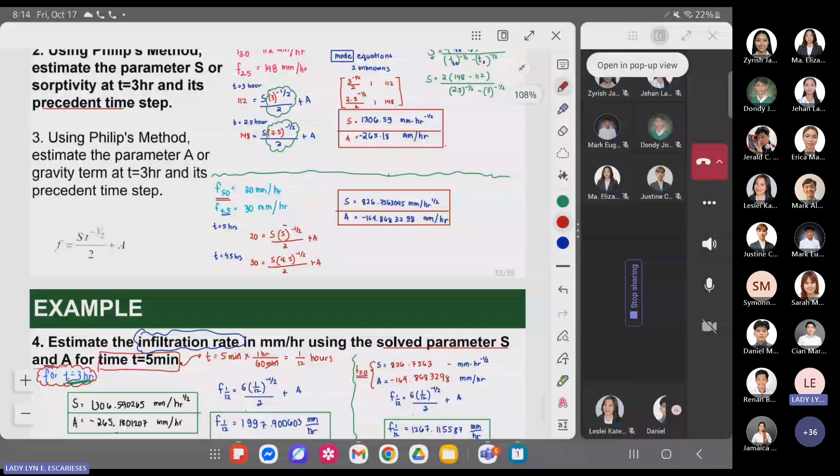So, kapag in-estimate natin yung infiltration rate in millimeter per hour using the solved parameter S and A for time T is equal to 5 minutes. So, meaning, tinatanong yung infiltration rate for T is equal to 5 minutes using the value of S and A. So, i-substitute lang natin yung value nun, ano po.

So, yung value ng S, substitute lang natin, which is 1,306.590265. Ganun din yung value ng A, which is negative 265.1801207. Again, kapag sa exam nyo, wag magra-round off ka agad. Okay? And then for the time is equal to 5 minutes.

So we have to convert that to hours. Kasi naka-hour yung unit of time natin dito, no? So 5 minutes multiplied by 1 hour over 60 minutes. So that is 1 over 12 hours. So times 1 over 12 raised to negative 1/2 lang natin yung S over 2 plus A.

So, tama naman po ba na 1,997 ang magiging infiltration rate, no? At 5 minutes using the parameter S and A na na-solve natin kanina. Tama po ba itong na-solve na to?

Okay. Now, try naman natin itong S and A na solve natin using the infiltration rate at 5 hours. So, ano po ang magiging value ng infiltration rate at 5 minutes or 1/12 hours? Paki-substitute naman. Paki-substitute po.

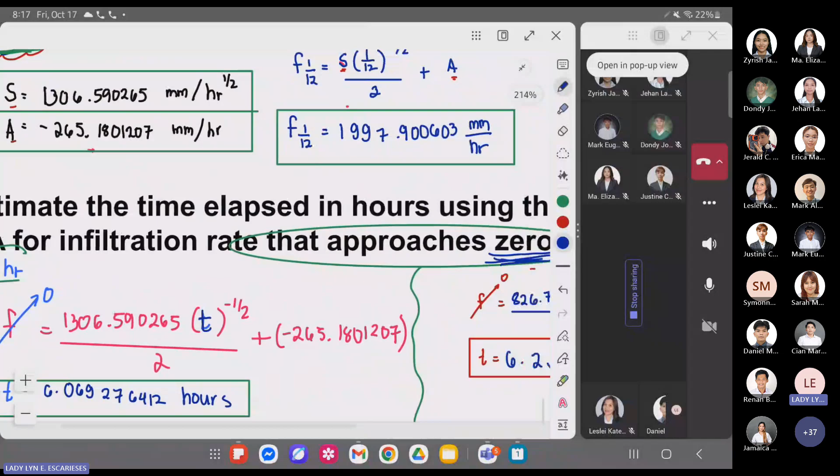Yes po. Dun sa last question naman, we are asked to estimate the time so that the infiltration rate approaches 0. So we will equate the infiltration rate to 0. Using the value of S and A, T is equal to 3 hours. So the time is 6.069 hours. Ibig sabihin daw, mag-a-approach to 0 na or hindi na mag-infiltrate, at 6 hours. Okay?

Ay, ito na yung ponding time. Okay. Paano kung ito naman yung gagamitin natin? So, the time is equivalent to 6.29 hours. So, almost malapit pa rin naman, malapit naman na 6 hours. Okay? Clear naman po ba ito? Naintindihan naman? Maliwanag?

So, as you can see dito sa table na ito, sinolve yung parameter S and parameter A at different time step, from 1 hour to 6 hours. Kaya walang parameter S and A dito sa 0.5 kasi walang infiltration rate dito sa T is equal to 0 hours, wala tayong masasolve. Kaya dito tayo may masasolve sa T, time step equal to 1 hour. Okay? Ayan yung mga nasolve natin kanina. Tama ba? Ito yung 826, at 164.

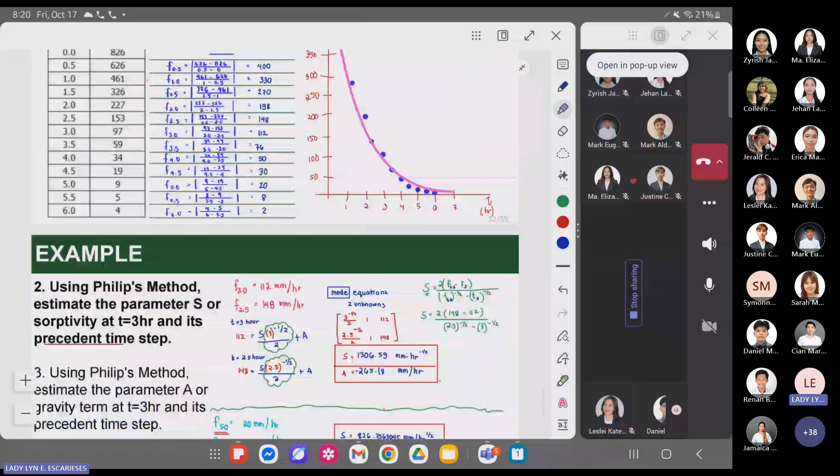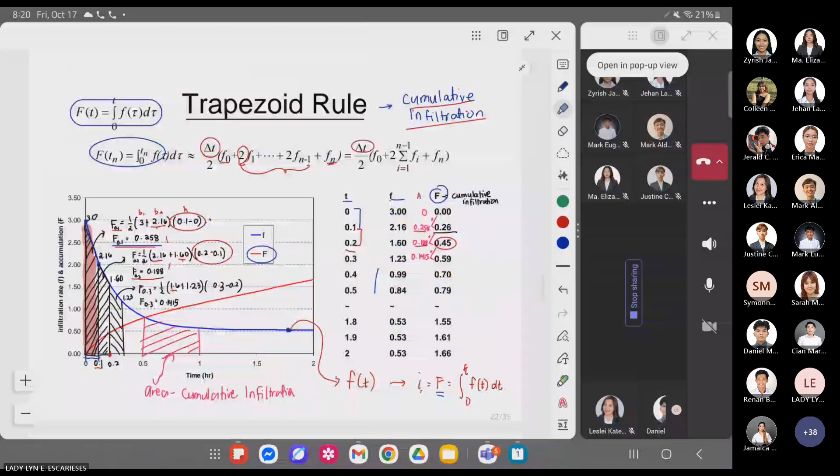So, sa quiz, itong Philip's method lang yung focus natin sa quiz ang i-apply natin. And also, isama na natin tong part ng parameters, yung may parameters. Yung soil parameters, and ponding time using Green-Ampt method. Okay? Hindi na itong infiltration rate at cumulative infiltration sa Green-Ampt kasi tatagalan tayo dyan, pagsasolve. Ito siguro, sasama din natin yung sa trapezoidal rule using the Hortonian infiltration. Okay?

Any question po? May tanong po ba kayo? Tanong sa ating module for today? May tanong po ba kayo? Wala naman. Clear po ba yung diniscuss natin today? 70 po ang passing, 70.

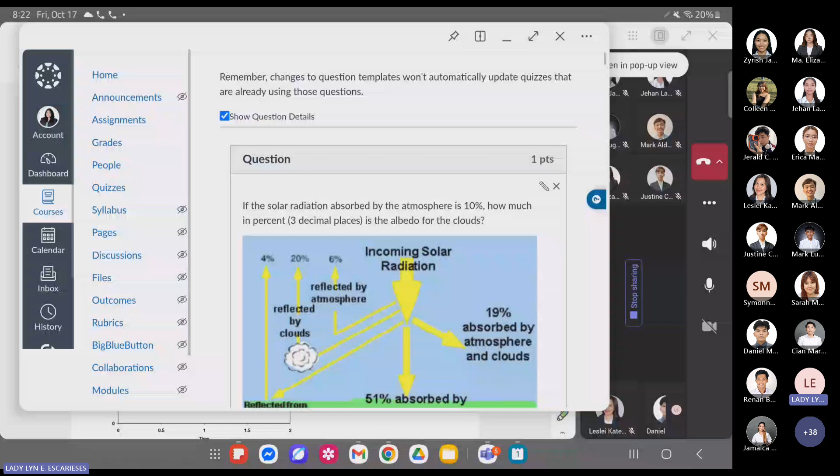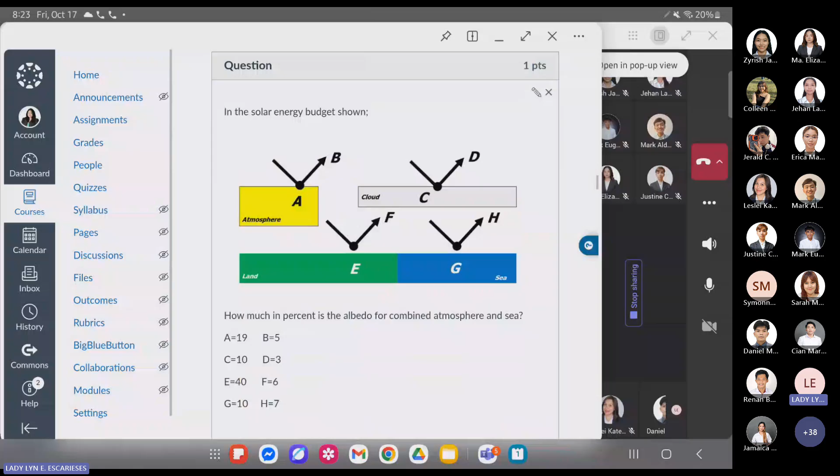Ito na nga. Hindi ko na isa-isahin ha. I-scroll ko na lang, kayo na bahala. Naka-record naman to. Huwag kayong mag-alala kasi ayan, may margin of error na 0.1.

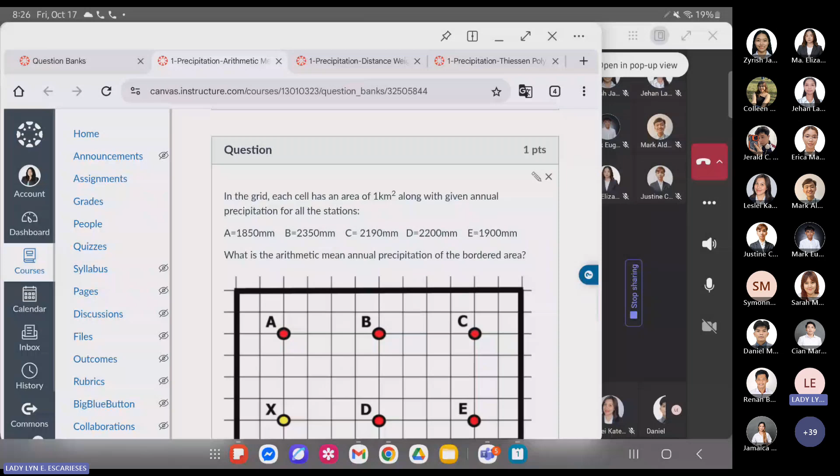May bonus dito eh, nasaan na nga ba? Sa arithmetic mean ata yun yung may bonus, may correction. Ito ba yun? May isa dito eh, yung may figure. Basta may isang bonus dyan. Ano ko na lang, bonus ko na lang sa lahat. So, kung nandun man yung question, bababaan ko na lang yung over. Okay, ganun na lang. Pero isa lang kasi yun.